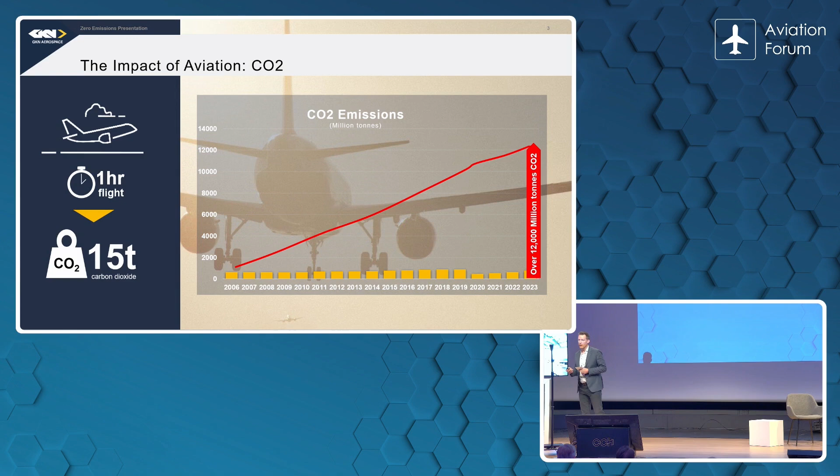However, carbon dioxide is not the only way in which aviation is impacting the environment. So if we take carbon dioxide as the starting point, the other key contributor that we have is nitrogen oxide. Now, nitrogen oxide is created in the combustion engine when we take air, which is sort of 78% nitrogen, and combust the fuel. We end up with nitrogen oxides in much smaller amounts than carbon dioxide, but nitrogen oxides are much more powerful as a greenhouse gas, about 300 times more powerful.

And in addition to that, they also have negative effects on people's health and ecosystems and so on. So nitrogen oxide is not that far behind carbon dioxide in the overall negative implications of aviation on the environment. And then the third, but potentially the largest contributor that we have as an industry is actually the contrails. So contrails are formed when particles from the exhaust stimulate ice crystal formation in flight, and those contrails form effectively pseudo-clouds.

Many estimates believe that contrails contribute something between 30 to 50% of aviation's impact on the environment. Now, this is a really hot topic right now. In particular, here in Germany, with some great work led by the DLR, there's an increasing understanding and knowledge of contrails, and I'm not going to spend a lot of time on that.

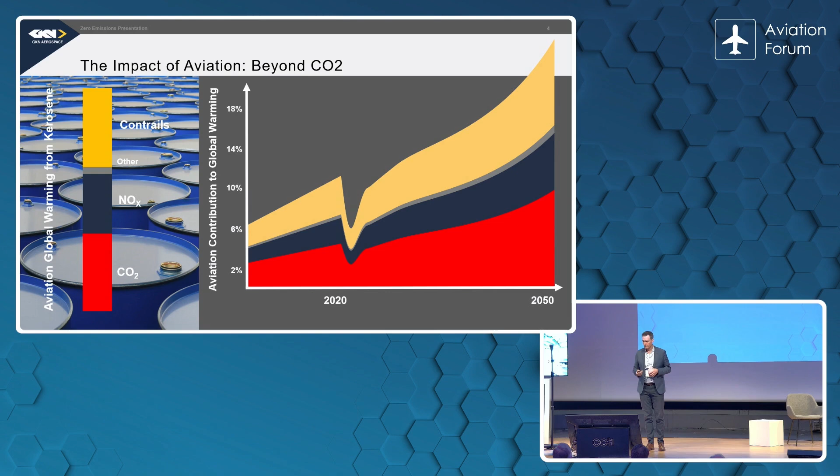Coming back to carbon dioxide. Now, carbon dioxide is generated in different ways for different ranges of flight. Most of aviation's flights are actually relatively short. So 80% of flights are below 2,000 kilometres, and those 80% of flights only generate about 40% of aviation's carbon dioxide emissions. Conversely, the top 10% of longest flights contribute 50% of aviation's impact on carbon dioxide. So the key message here is length matters.

There is the opportunity to use gaseous hydrogen, and I'll come to hydrogen in a second. However, with gaseous hydrogen, the increase in weight associated with the pressurized tanks offsets the benefit, and the range capability is probably fairly limited still. And that's the reason why pretty much everyone in aviation is talking about liquid hydrogen. And with fuel cells, liquid hydrogen has the ability to push that range capability further.

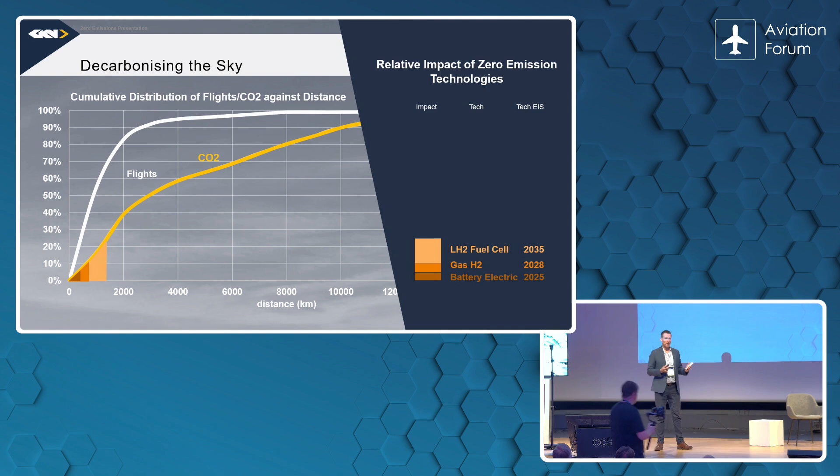The challenge we get then is, as you start to increase the range capability and the payload capability of aircraft, the power requirement gets much bigger. And as that power requirement gets bigger on an electric aircraft, with conventional technology, that ultimately means pushing voltage up. And voltage at altitude is much more challenging than voltage on the ground to manage. And that's the reason why GKN Aerospace are focusing on a technology which I'll come to in a second, which is all about enabling much higher power, but without increasing overall voltage levels.

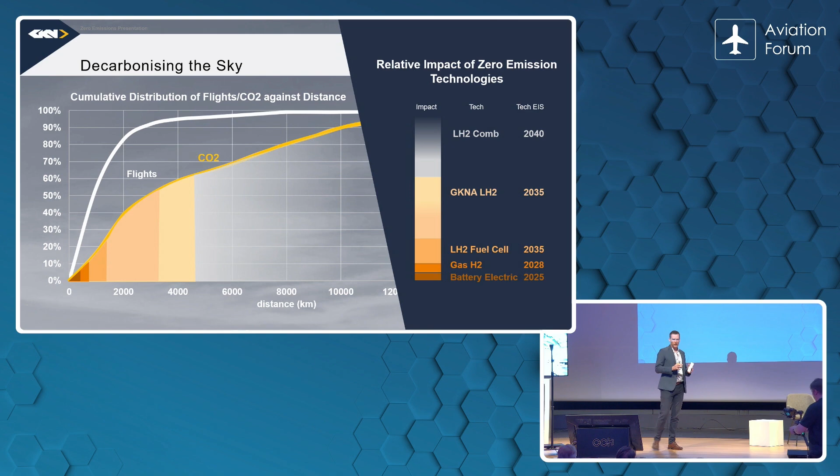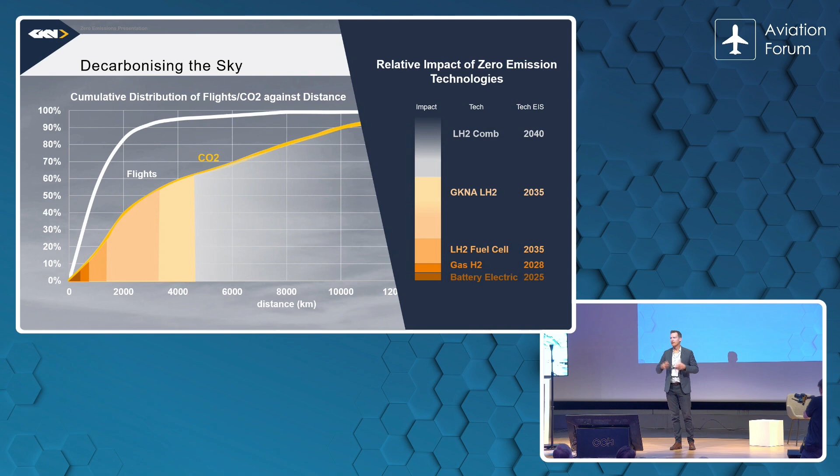We don't know what the limit of that capability is. However, we do also believe that at whatever point that limit of capability comes, hydrogen combustion is also a potential technology which has the opportunity to expand that payload range for the entire requirements of aviation.

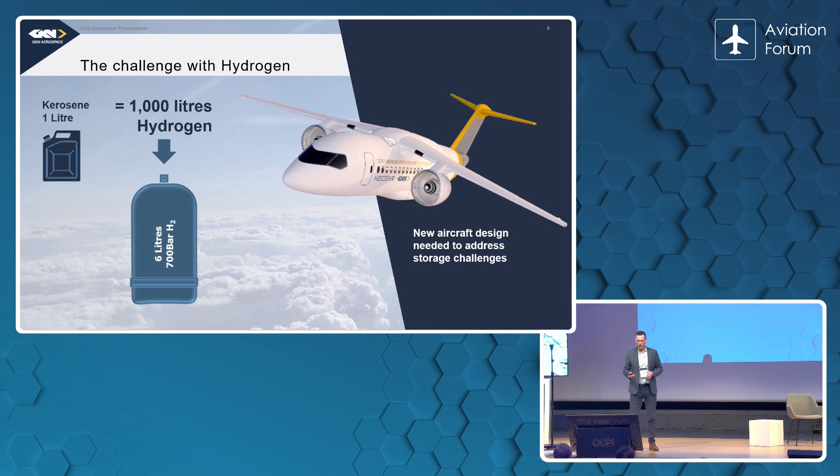So, a bit of basic level setting in terms of hydrogen. Really important stuff because it fundamentally drives why all of this is quite complex. So, a single litre of kerosene gives us about the same level of energy as about 1,000 litres of hydrogen. Now, clearly, we're not going to carry around 1,000 litres of uncompressed gas, so if you compress that, you can get that down to about, let's say, 6 litres of hydrogen. And by the way, that's extremely high pressure, very, very heavy tanks, which means the weight is clearly an issue.

The alternative is therefore, as I've already said, moving to liquid hydrogen. And liquid hydrogen, you can get that down to about 4 litres. So just take a second. That means to get the same amount of energy as a litre of kerosene, you need 4 litres of liquid hydrogen. Now that 4 litres of liquid hydrogen is actually a third of the weight. So on one hand, you've got a really great environmental solution because there is no carbon in the fuel. So you've got a really low weight, really great environmental solution.

That's offset by the complexities associated with storing a liquid at minus 253 degrees on an aircraft, and all of the complexities of managing that, and clearly cost and so on. So we have to balance those in any design we come to. And ultimately, that drives a significant change in the architecture of at least the systems, if not the aircraft themselves.

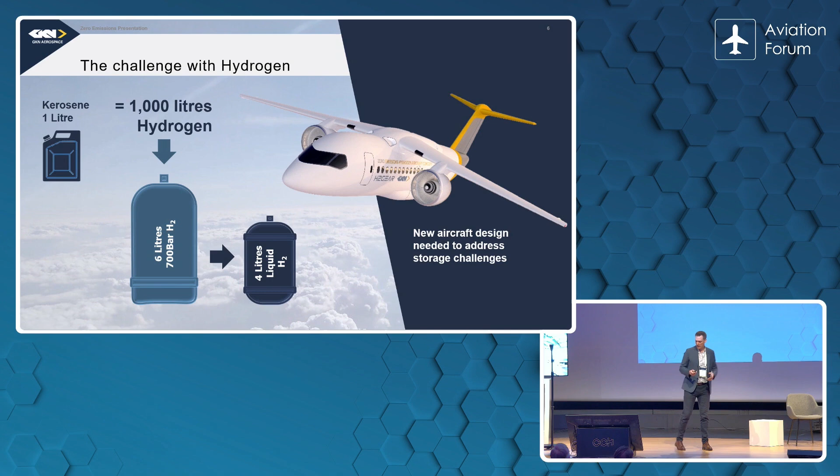So where does a company like GKN Aerospace even start on this type of mission? Because GKN Aerospace are not an aircraft OEM. We have some legacy. The Fokker company is part of GKN Aerospace. And we also have an engines business with legacy in Sweden with OEM capability. But we're not an OEM. We don't have a strategy to be an OEM. Where do we start? Well, the reality is we sort of had to start from the beginning.

We weren't in a position where our customers were giving us the technical requirements for a hydrogen electric propulsion system. We weren't in a position where we could go to the regulators and say, how will these regulations change with the introduction of hydrogen electric? We weren't in a position to go and talk to our supply chain and buy the individual components of a system that we could then integrate into an aircraft, let alone understand what the requirements for that type of system were for an aircraft that doesn't exist, that our customers haven't even decided themselves what that will look like. So we effectively had to operate like a pseudo OEM.

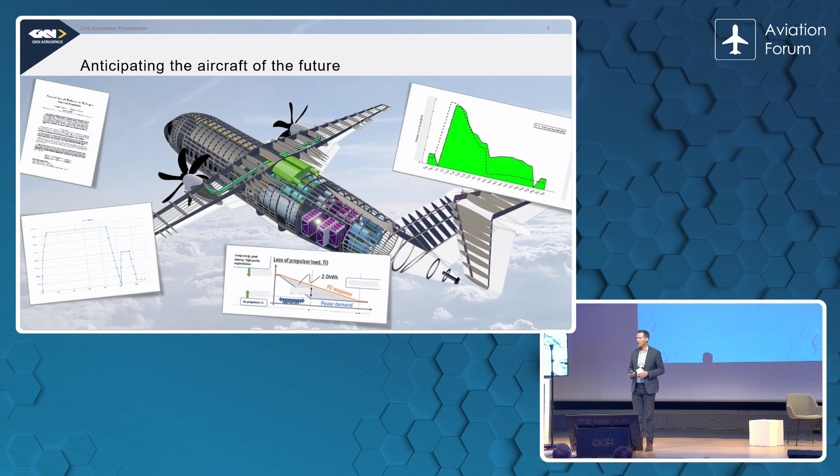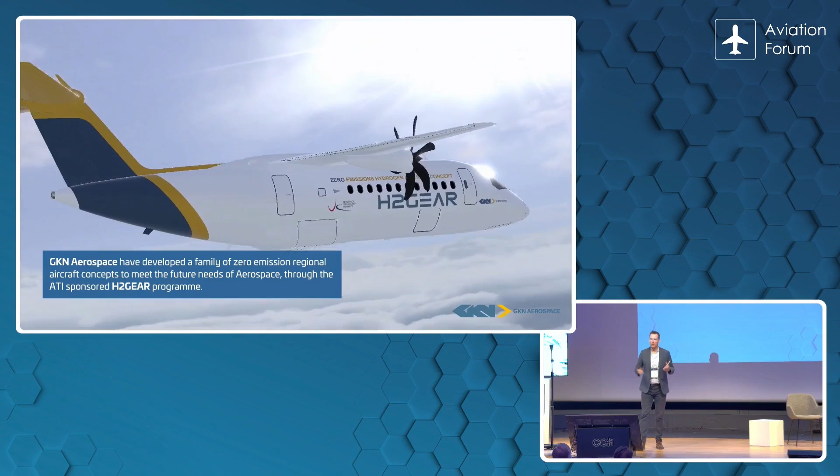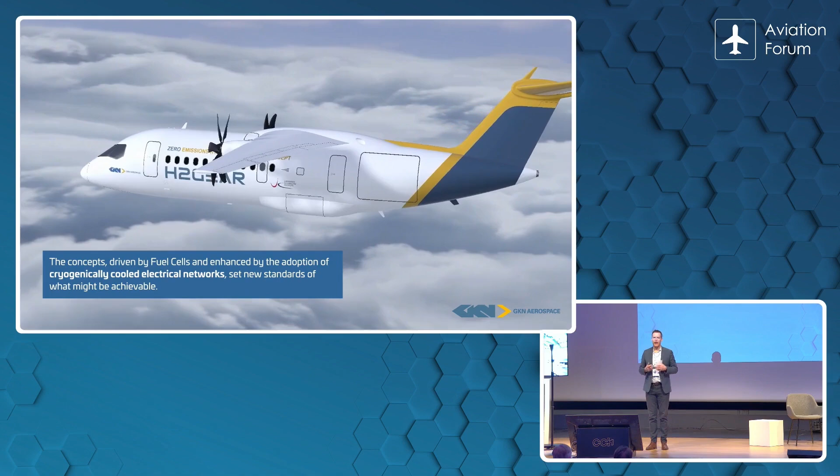We had to operate, as I call it, one level above our station to anticipate what the future requirements of those future aircraft, of those future technologies might be. And the way that we did that is we developed what we call our notional aircraft concepts. And these notional aircraft concepts are not just pretty DMU pictures. These are concepts that have been analyzed for aerodynamic performance, handling performance, takeoff and landing performance, aerodynamic loading, structural sizing, and how all of those drive the optimization of the systems themselves. And we've done that in order to then translate those needs into the requirements for the technology on our aircraft.

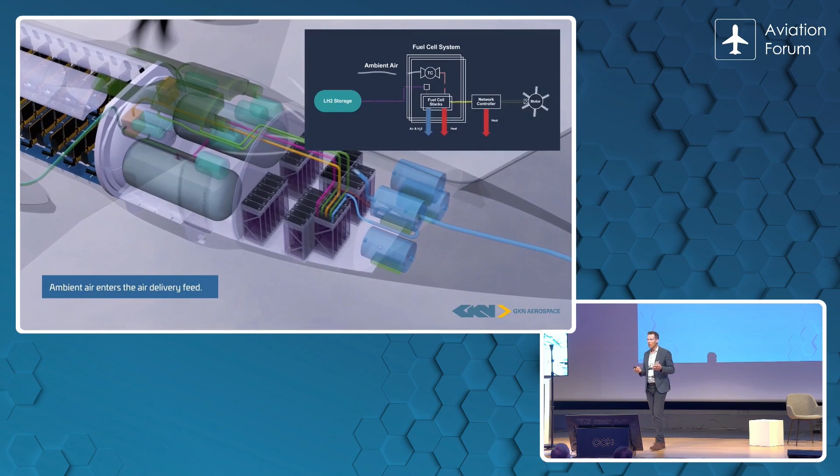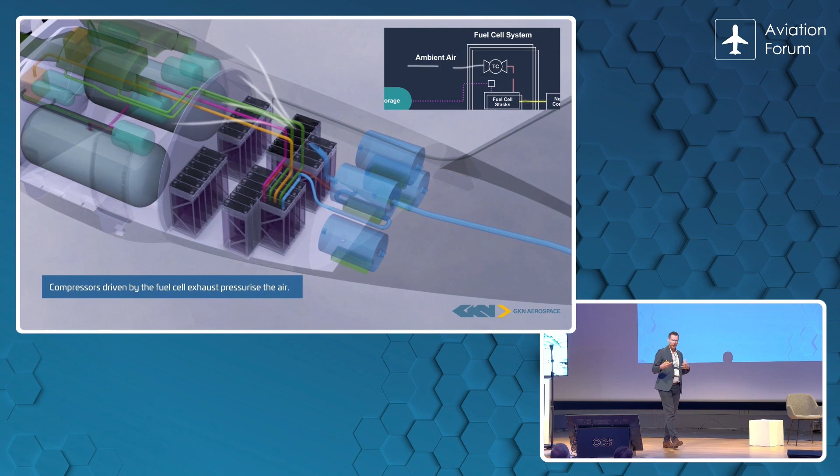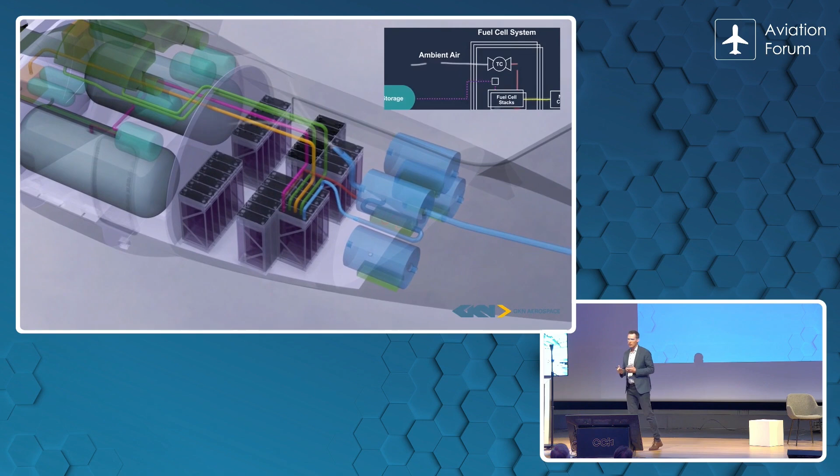And how does that work? Well, it takes cold, low-pressure air from outside the aircraft. We then have to compress that air, which then increases its temperature. We then have to cool that air, so we give air of the right pressure and the right temperature to our fuel cells. We then have hydrogen that's stored as a liquid, as I mentioned, on the aircraft, and we then need to increase the temperature of that liquid hydrogen to a level that we can then transition to a gas and pass it into the fuel cells.

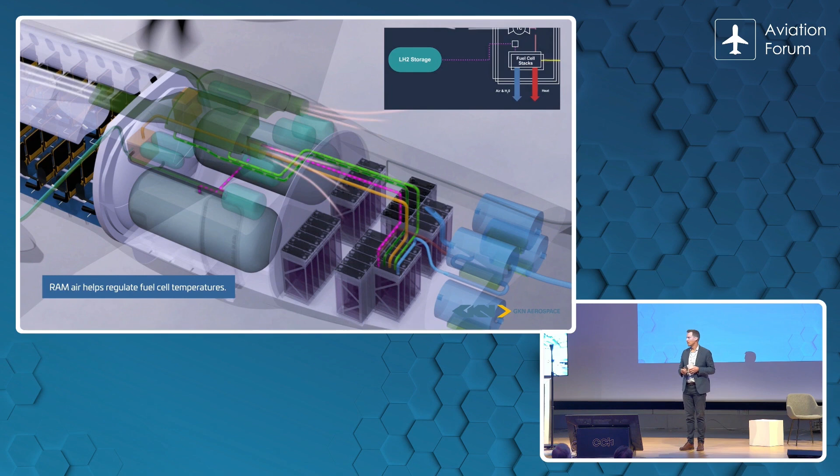The fuel cells then create an electrochemical reaction. The byproduct of that air and hydrogen creates an excess of heat and water, and that heat needs to be managed through a combination of ram air and also some other cooling medium.

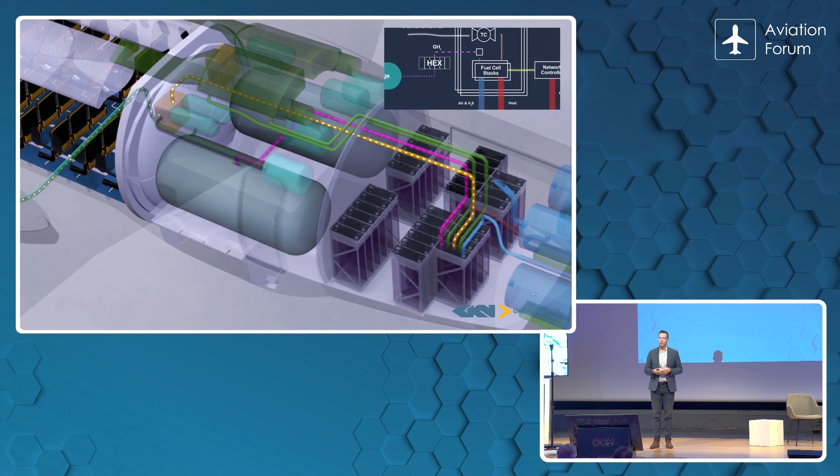Now, the really clever part of our system is that the electrical power that's generated, we mentioned the fact that we have to heat up the hydrogen. We do that as a byproduct. We manage to cool down helium as a separate medium. And that helium is used to cool our electrical network and our electric motor.

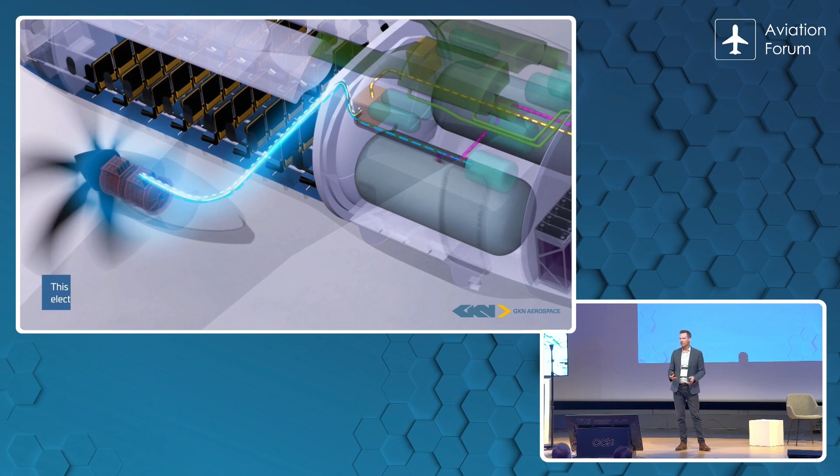Why is all of that important? What that does, by reducing the temperature of the network, is we significantly reduce the resistance of the power distribution and also the electric motors. And by doing so, we improve drastically the efficiency that is possible. And all of that efficiency cascades back upstream into the sizing of the fuel cell system and level of power and fuel needed on the aircraft.

We've only just started over the last 3 years on our journey. H2 Gear was our first big program, started in 2021, which is all about the power system on the aircraft. So far, we've managed to complete almost the full detailed design of our ground-based demonstration components. At the beginning of next year, we're going to start the physical test of those components. Moving into the following year, we then integrate those into a ground-based demonstration, which we aim to finish by the end of 2026.

At the same time, we're also now launching with our partners, Parker and Marshall, another program, which is then to do the same process on our fuel cell system. And then subsequently, and yet to be announced, we will be taking both those systems to a flight demonstration by the end of 2028 with a particularly well-known Brazilian regional aircraft company.

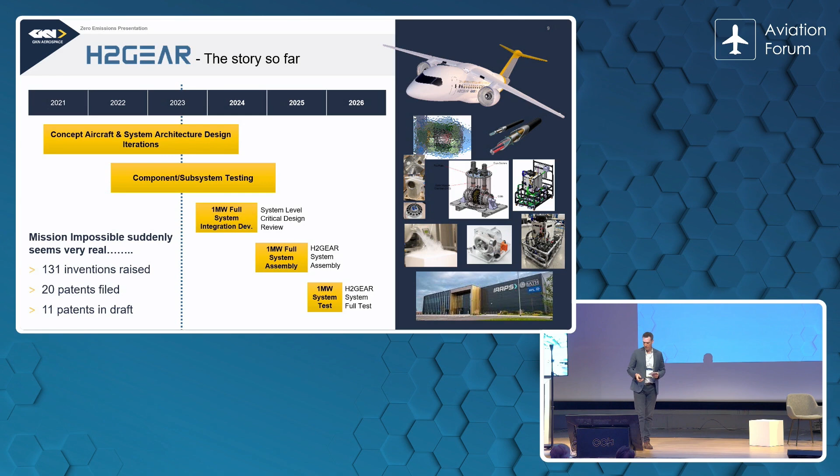Now, it's probably fair to say, even just at the level that I described, which was pretty much the 35,000 feet level of description of our system, you can probably already start to get a feel for the fact that this is actually pretty complex stuff. And probably the biggest challenge for us is that no matter how good a job we do at developing this technology, even if we absolutely blow it out of the park, even if we deliver the best possible concept, we can't be successful unless our partners, our suppliers, our customers are also on the journey with us.

The reality is this is all pretty complex and difficult stuff. And even if the products work brilliantly, they cannot be successful unless there is a vast amount of liquid hydrogen that's available, that's been produced using renewable electricity in order for it to be properly green. It can't be possible unless the right economic conditions are set through the right policies that are globally collaborated on.

And our customers, ultimately, they're the ones who have got the really big, bold decisions to make. The decision to launch a brand new aircraft that bases itself on a fundamentally different technology. Wow, that is a bold decision by any OEM. And that OEM needs the confidence of their customers that not only will the aircraft operate how they need it to operate, but all of that other complex stuff, the infrastructure around the airports, the availability of hydrogen, the economic policy decisions, all of those things need to convince the OEM's end customers to put their money on the table and say, yes, we want to invest in the future.